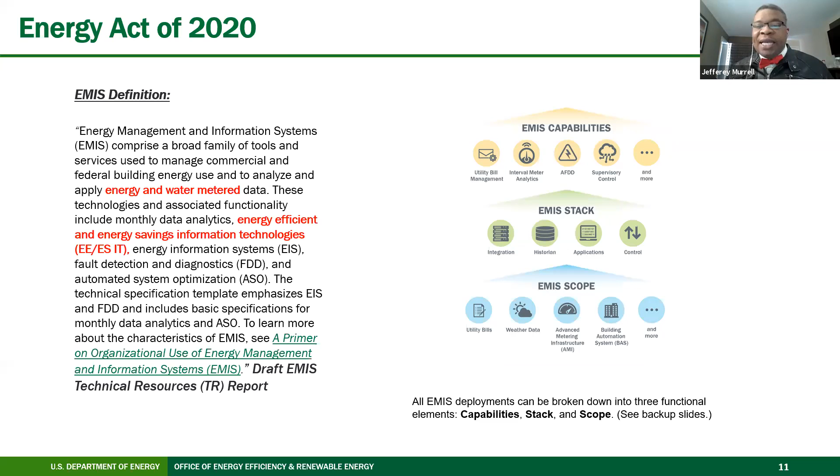As I mentioned before, we're basically learning from what's been done on the commercial side. Over the last 3 years, Cedar Blazek and her crew have been working on a smart energy analytics campaign. This campaign involved more than 104 organizations, representing more than 6,500 buildings, involving more than 567 million square feet. The EMIS software presented represented more than 40 different EMIS vendors that have been installed.

Some of the energy savings that we have achieved so far is for just energy information systems, about 3% has been the aggregate total. In terms of fault detection, it's about 9%. In terms of annual cost savings, it's been about $95 million, with annual savings somewhere around $3 million. This is one of the key things: the investment payback is usually between 1 to 2 years, with the average being 2 years. So if you'd like to know more information about the Smart Energy Analytics campaign, please click the link below.

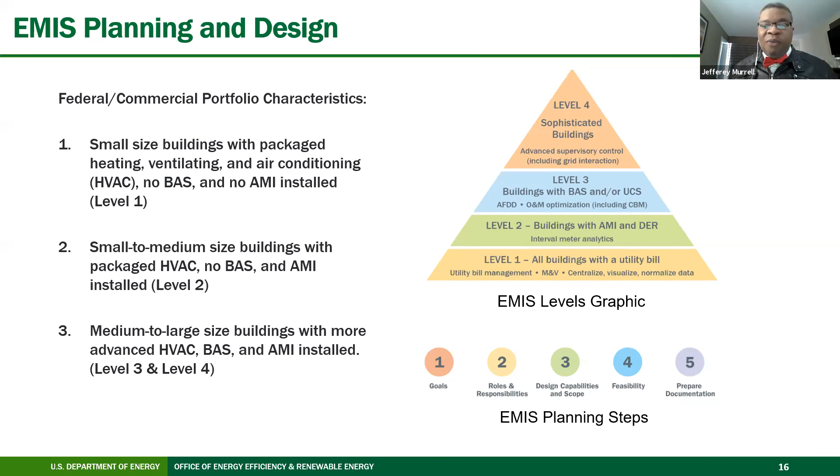They're very fine panelists, and I've listened to their presentations in the past, and I've even learned a lot of new things that we'll be incorporating when FEMP comes out later next FY with the Federal Smart Energy Analytics campaign. Just a quick reminder, if you're having any issues, please message our technical support team using the Zoom chat function. Now we're going to ask our panelists to unmute and introduce themselves.

Let's start first with Wendell. Hi, I'm Wendell Brase. I'm the Associate Chancellor for Sustainability at the University of California, Irvine.

All right, thank you, Wendell. And now Becca. Hey, Becca Rushin with Jamestown. We're a commercial real estate owner based in Atlanta, Georgia. I've been with the company about 8 years and currently serve as their Vice President of Sustainability and Social Responsibility. Thanks for having me.

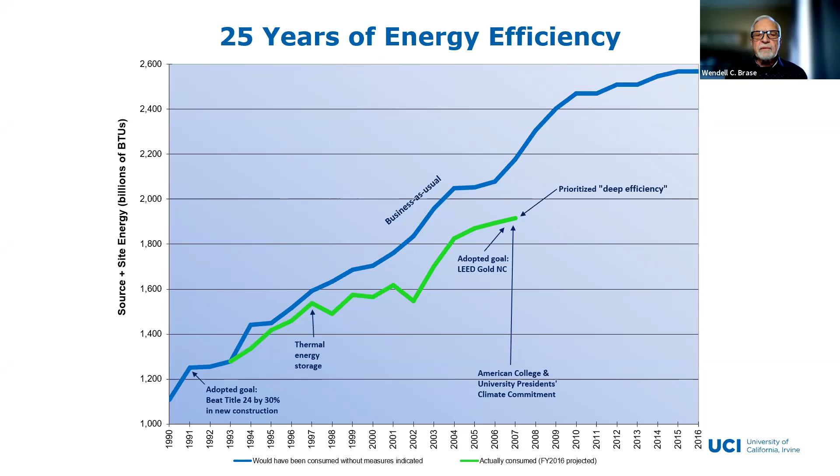By the way, the campus was continuing to grow. That top curve is basically a surrogate for campus growth. This was all kinds of buildings, you can imagine. But let me show you what happened after 2007.

That's what happened. It's all because we prioritized what we call deep energy efficiency, and I'll explain exactly what that means to us as we go forward.

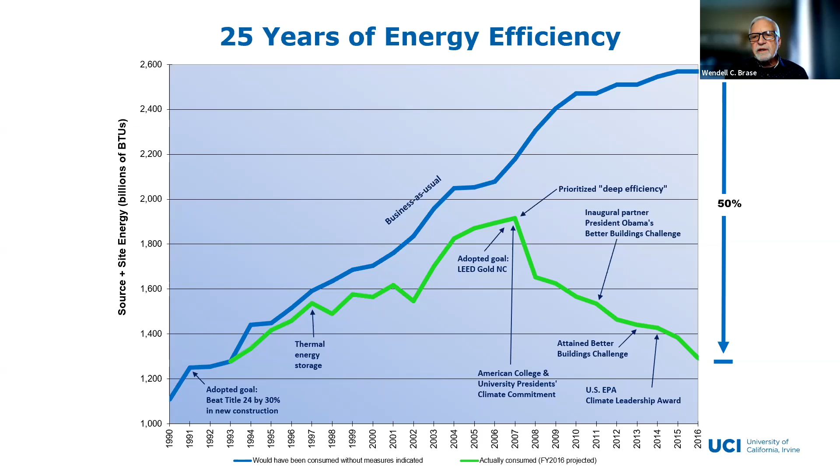What you see here is, if you go back and look at where the green and blue lines departed in 1993, we doubled the size of the campus over the period displayed on this chart, doubled the size of the campus, and we're using the same amount of energy.

So why was this possible? You might wonder, it'd be a fair question to ask, maybe our buildings were so inefficient to start with that everything we did was low-hanging fruit. Well, that actually wasn't the case. Our campus had been built to the same standards as any other young or middle-aged campus in the University of California. That does not explain how we got to 50%.

We knew that waste had been built into designs because as we were building new buildings, I went to a lot of value engineering sessions where I heard a lot about the so-called margin of safety. After hearing that term used by design engineers probably 50 times, I started to get skeptical. Finally, when I dug in, I realized that margin of safety wasn't more safe for students or occupants, it was more safe for design engineers. It meant they didn't have to dig as deep.

The other thing we started questioning was this whole idea that kept coming up, that more is better. We thought that was probably not evidence-based, and we're a research university. We believe evidence-based findings are very important.

Then we focused on laboratories, which we knew were energy intensive. We didn't realize quite how energy intensive until we really measured it. They're 5 to 10 times as energy intensive as all the other types of space on a campus. That's because all the air in a laboratory goes through one time, it's once-through air, and they tend to have long hours, and in many cases pretty high heating loads because of the energy intensity of what's going on inside the building.

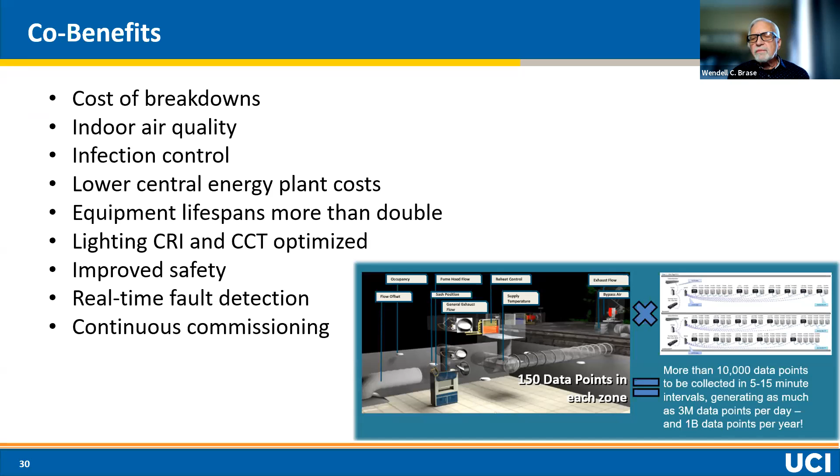Other things we learned: building systems indeed had been designed to worst case conditions. We sort of knew that going in. We were right. More is not necessarily better. In many cases, you have better infection control and contaminant control based upon the quality of airflow as opposed to the quantity.

And so as we were optimizing smart building design, we actually moved diffusers and changed diffuser designs and that kind of thing. We focused on quality more than quantity because that paid off, and it actually made for a safer campus.

The project at the margin, I said earlier, may be a clear winner when co-benefits are included. So we looked at it that way. And as I've said earlier, it's a combination of technology and attitude, but I always give the slight edge to attitude. Having an attitude that we can go deeper, we can question the status quo, we can look at evidence-based results, and it will get you much further.

I can guarantee, though, that aiming low will produce certain results. The certain result will be a low result.

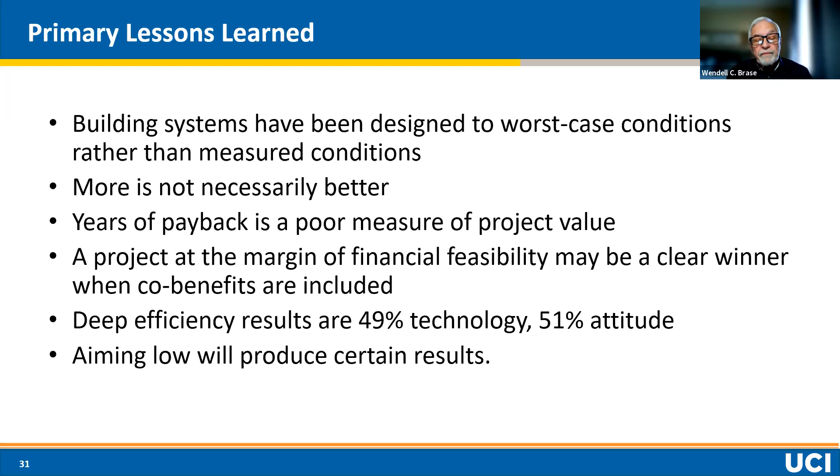So now is the time to go deep on energy efficiency. The cost of capital is low. We're going to be paying more for decarbonized energy. That was our assumption back in 2007 when we signed that pledge to become carbon neutral. We always thought that decarbonized energy would have to cost more than fossil-based energy, and a lot of people aren't really focused on this because they're enthralled by the very good news that the cost of installed solar and installed wind is going down a lot.

But the real costs of decarbonized energy aren't going to be in the sources of renewable energy. It's going to be in reimagining, redesigning, rebuilding, and reinvesting in an entirely different kind of infrastructure, which is going to be a way more complex grid with the capacity to do stabilization, resiliency, seasonal storage in a climate that's getting more extreme. So all those things I just mentioned are going to get harder to manage. It's going to be replacing a gas grid and an electric grid that have been in place for 50 years.

Many of those investments were paid for a long time ago. So we think the cost of decarbonized energy is going to be, in round numbers, double the cost of fossil-based energy. But the best way to address that is to use half as much. And that's been our basic overall strategy, and it remains that.

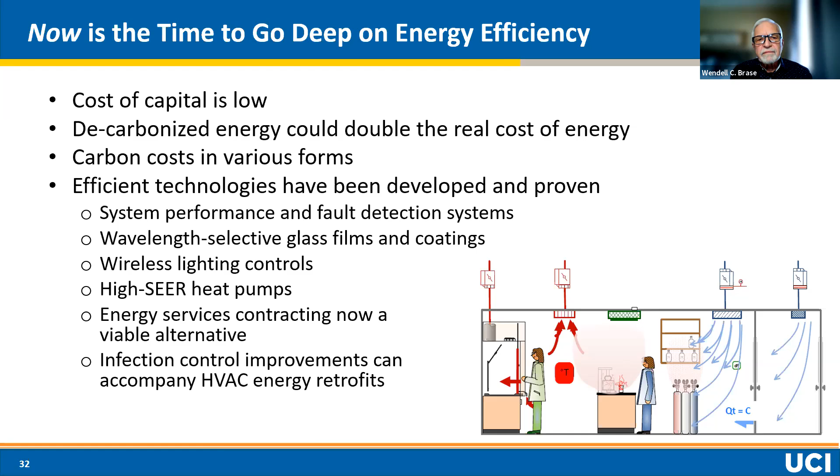I think that's my last slide. Do I have another slide? No, I'm done.

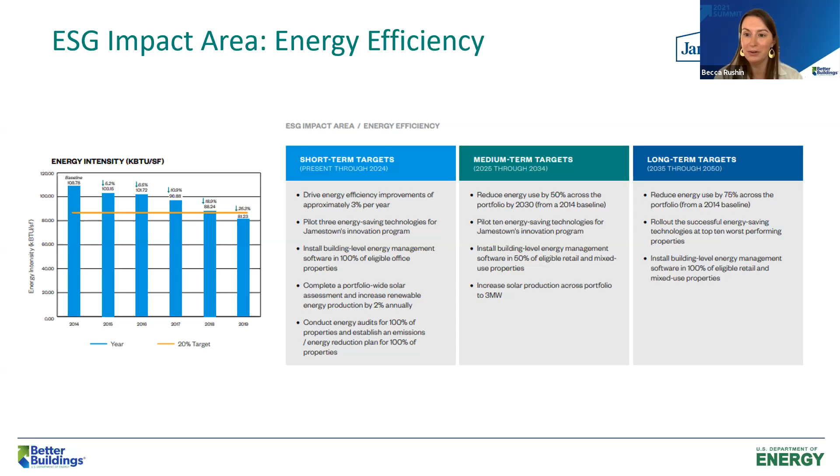Sustainability in general is always going to be very dynamic—it's always a moving target. So I fully anticipate amending these over the years, but this is where we're starting and what we're focused on for the immediate future. Really, the EMIS systems are a huge component of how we're going to actually get there. You can go to the next slide, please.

I think it's important not to get discouraged if you can't go super deep right away. But at the same time, my goal has been to ensure that we're doing at least a baseline of activity or energy management at each of our properties.

When I started in 2008, Wendell, I was also very impressed that y'all have been benchmarking for as long as you have. I inherited a bunch of really crummy Energy Star accounts that were all incorrect and burned lots of hours and brain cells trying to clean all of that up.

We really didn't have what I considered a super clean baseline until 2014. It took like 2 years to get that to a level where we could audit our data and get it verified. But at this point we have buildings that kind of hit all of these levels.

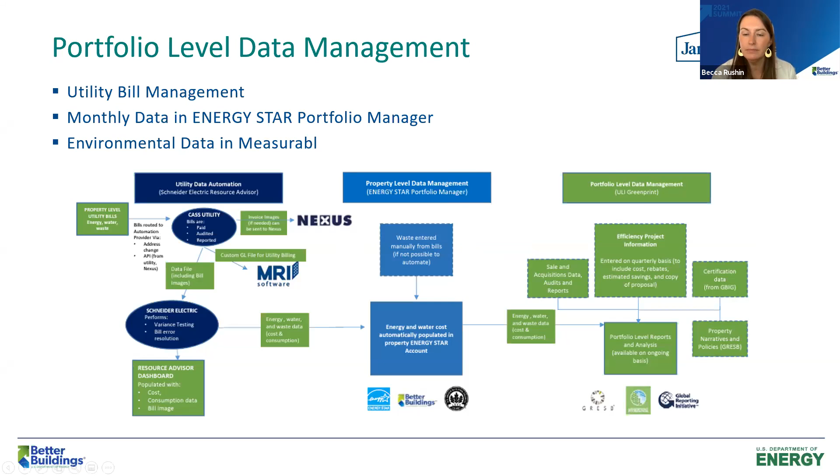I think where the rubber really meets the road is with our property level energy management. I talked about the UBM. We've been doing real-time energy management since 2013, and I think all the platforms, all the providers have advanced a lot over the years. For a while we were pulling utility interval data, which for some buildings was like a couple hundred dollars a year - very cheap. It wasn't the deepest data, but it was nice to get warnings on peak demand. Then we moved more into real-time interval data plus demand response. We started with about 5 buildings and now have about 14 on that system.

But I mentioned our special snowflakes earlier - our 2.1 million square foot mixed use facility is a lot more complicated and expensive to roll out something like that compared to our more traditional office assets. So a lot of the buildings on our real-time interval data platforms are office buildings, and we have most of them with one vendor. It's really nice to log in and see all of those buildings in one place, get quarterly reports. But I'm not completely married to only logging into one portal - that might be a personal preference, but I'd rather have the right solution for each project.

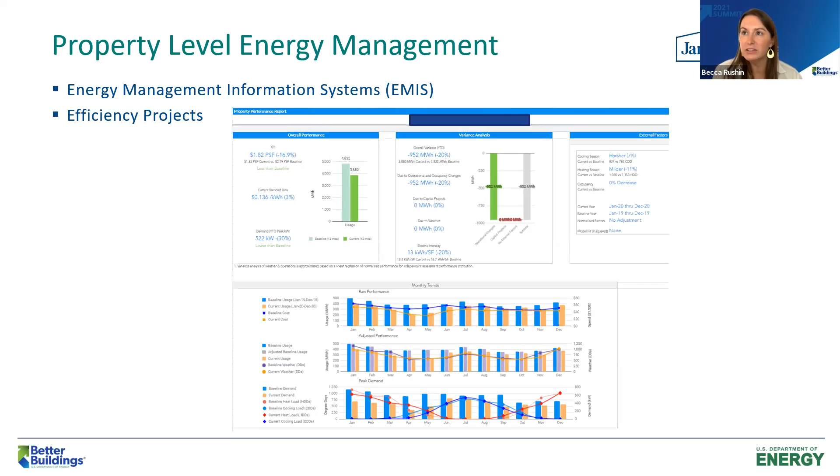I'll stop there, but we'll monitor the chat for any questions.

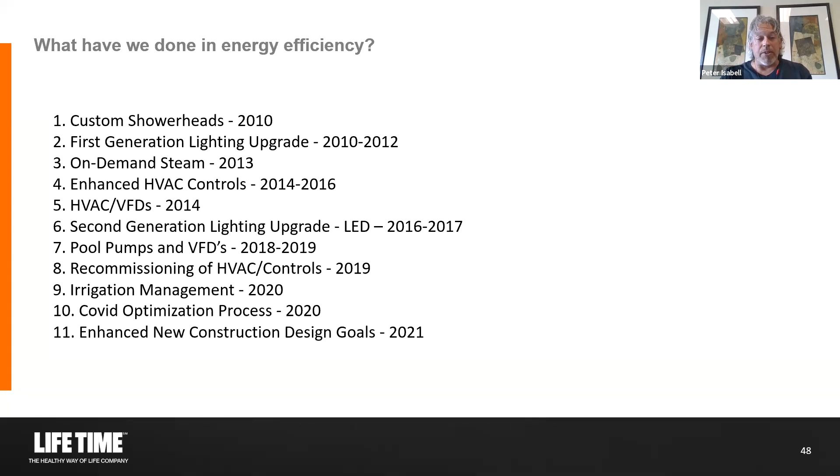I wanted to go over some stuff we've done in the past. It's taken 11 years to get where we are. We started with some shower heads, a first lighting upgrade, brought 8 controlled systems into our fleet in 2014 trying to get under a single pane of glass - retrofitted 100 clubs at that time, and had new construction clubs under a single pane of glass to have all of our energy management data under one supervisor. Did an LED upgrade in 2016 and 2017, VFDs in our pool pumps, and a few more things, then put new construction design goals for new clubs being built. We're building anywhere from 500,000 to 1 million square feet of clubs per year.

So basically, what was the impact over the last 11 years? Electric's down 35%, gas down 15%, water down 10%. Pretty good, water not so good. This is normalized for everything we put into our clubs as adders—we're constantly making changes to our facilities, increasing pool temps to serve our members, adding mechanical equipment to cool server rooms or laundry rooms because we've added load.

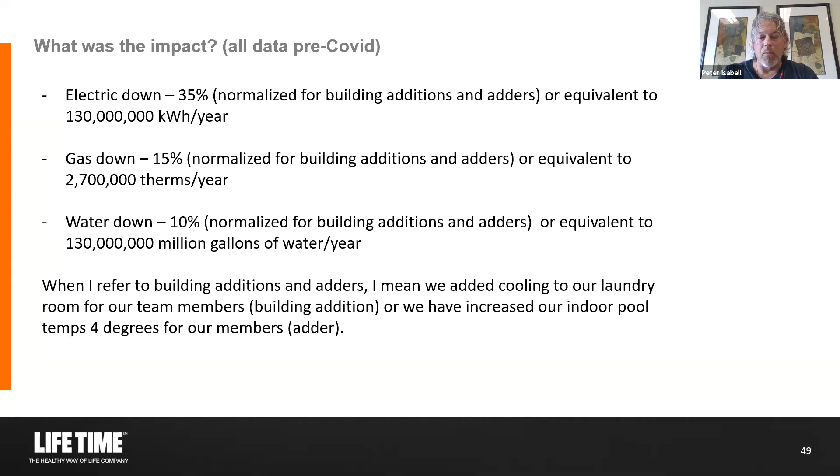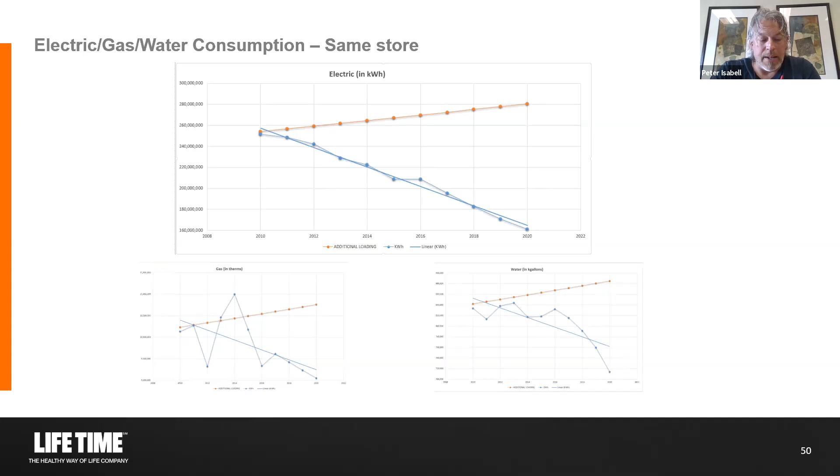So we normalize for everything we add from an electrical, mechanical, or water standpoint. These are just some graphs showing progress over the last decade. As you can see, electric is down. This is our same store—we took a sampling of 100 clubs. The red line shows an incremental 2% electric adder for those mechanical adders I mentioned. So electric, we made the biggest improvement as a fleet, down 35%. Gas and water, not so much.

Okay, where are we going as a fleet? As I mentioned before, it took us 11 years to get where we're at. But we're going to reduce our electric and gas down another 20% over the next 3 to 5 years through stuff after the low-hanging fruit. And water, we're going to drop another 40% over the next 3 to 5 years, which is a pretty significant goal for us.

That incremental 40% water reduction is equivalent to 650 million gallons of water per year. So we're a large water user. In 2019, pre-COVID, we used about 1.5 billion gallons of water, equivalent to a lot of cities out there. When we take the electric and gas total reduction of 55% and 35%, it comes down to a 50% total BTU load. Our electric BTU load is a lot more than our gas BTU load.

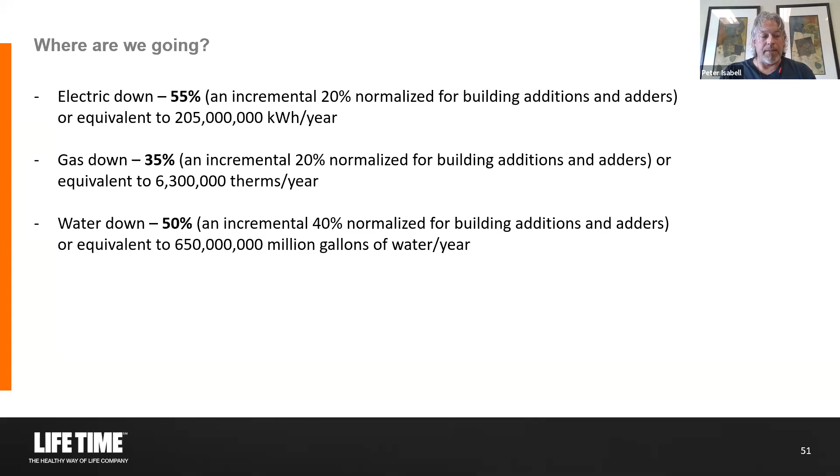So how are we going to get there? Big picture: we're going into baselining our clubs, analytics and reporting, variance management with EMS, with our bill pay process. We've been testing the waters in this stuff now. We're going into new clubs and creating more robust goals, then trying to bring them on fully commissioned to ensure they're running as efficient as they can right out of the gates. And then we're going to be educating our team members and members—we have over 30,000 team members within our clubs, and 1.7 million members. We're going to be teaching them about sustainability, and I'll talk about that in a future slide.

In the electric projects for 2021-22, we're going to go into lighting and control and validation. One thing we've noticed is we have a lot of lighting control systems out there. What we didn't know is not a lot of them work. So we did a survey at the end of 2020 through COVID—we actually had to shut all our facilities down for anywhere from 2 to 8 months. I started going to clubs after hours at night and seeing what was left on, and it was amazing. Things we thought we were controlling—we have 5,000-6,000 pieces of mechanical equipment, 300,000 lights—wasn't actually happening. So validation became a big focus for us going through the next couple of years.

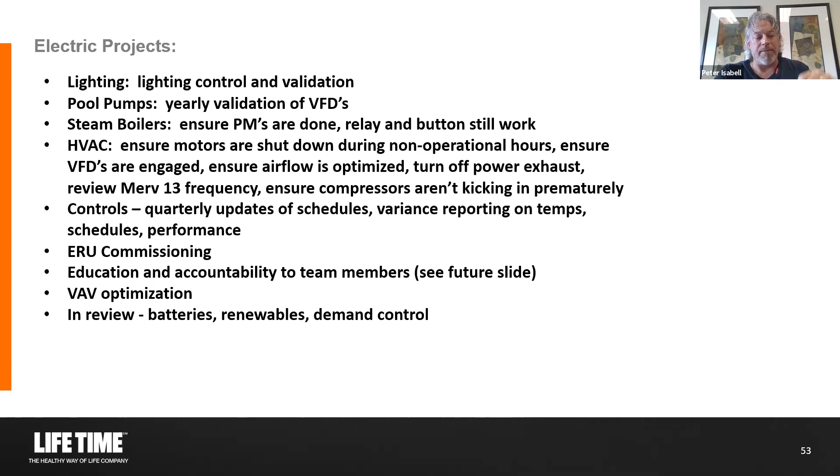Natural gas projects: like with electricity, we're going to be optimizing our RTUs, ERUs, and ensuring that we're continually providing the best outside air to our members, to ensure our buildings are running at optimum efficiency. Another thing—you have yoga spaces in a lot of these clubs, probably like 95% of them, that are locally controlled. A lot of people will just leave the yoga space on, heated to 95 degrees overnight, and they might even leave the door open. By watching trend data, we're actually able to see that not only is the space running at 95 degrees overnight, but somebody left the door open, and we can see that because it impacted another RTU.

So by analyzing trend data between adjacent pieces of equipment, we can start showing what we call exceptions, anomalies, or deficiencies in our process.

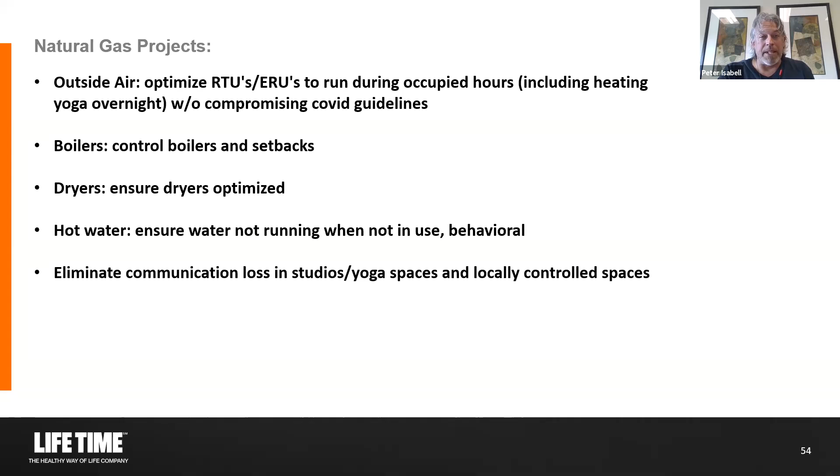Dryers - we do a lot of laundry. We do 3 to 4 million loads of laundry a year through our clubs, and those aren't just regular loads, they're 70 to 100 pound loads. So we want to ensure our dryers are optimized to optimize our natural gas usage.

Water for us is the hardest one to manage. How are we going to go forward? We implemented an irrigation management process last year, signed the contract, and two weeks later COVID hit - it was great. But even though we struggled last year, with a lot of employees furloughed or gone from the clubs temporarily, we were still able to save 20% of our irrigation water.

Showers - testing and validating GPM. We serve over 50 million showers a year to our members. So, a lot. Laundry again, and education and accountability - I'll explain a bit more of that in a couple slides.

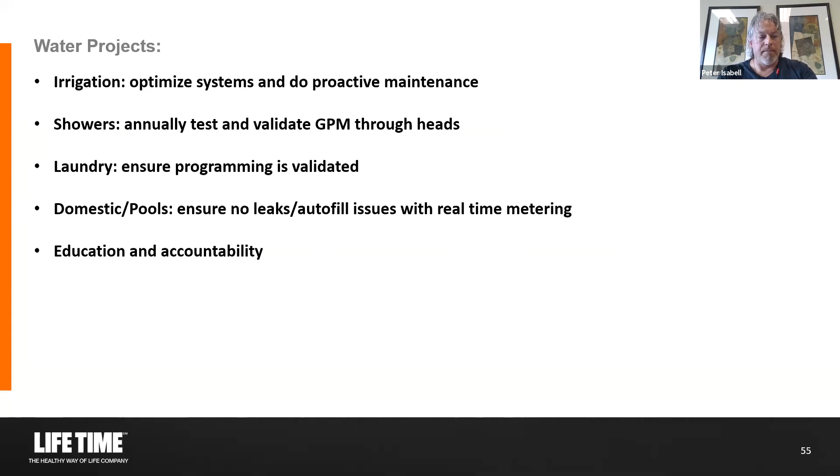One of the things we came up with to try to capitalize on the total 50% water reduction goal is to create a purpose that is outside of our four walls. In order to save 650 million gallons and have people understand that, it's about creating a behavioral thing for not only our team members but also our guests.

This started in our cafe, where I went to get a smoothie and watched a team member making it take the blender, put it under the sink, and let it run for as long as I was standing there. Because I'm an energy nerd, I got out my stopwatch and timed it - about 4.6 seconds to fill the smoothie maker. Then I found the volume of the smoothie maker and calculated it - we're going through $12,000 worth of natural gas and water just at that one sink with that one behavior.

So if I can create an educational process and a thing outside of our four walls, we as an organization might think differently about our behaviors.

Just some statistics - maybe not necessarily lifetime related, but $5 can help bring an individual clean water for a lifetime. So what can $1 million do?

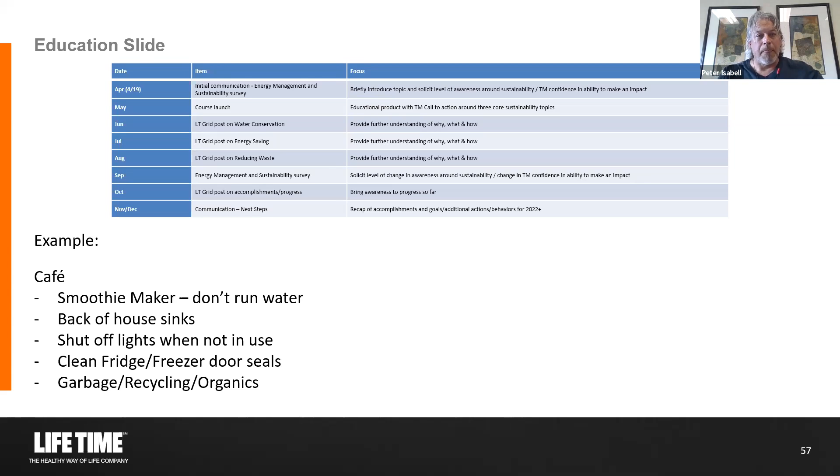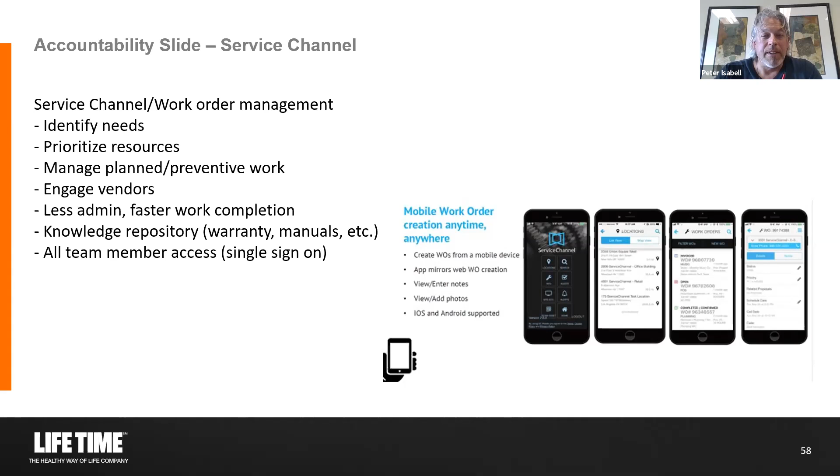Lastly, as we're trying to take all of our EMS data and energy data, we're trying to put it all under one portfolio or one supervisor. We're linking that information - deficiencies, variance, alarms, performance issues - and rolling those out into tasks for our building operations engineers and ops. Those get reported on Service Channel, and we're going to start looking at analytics on variance, alarms, and systems. So, I think that's about it.